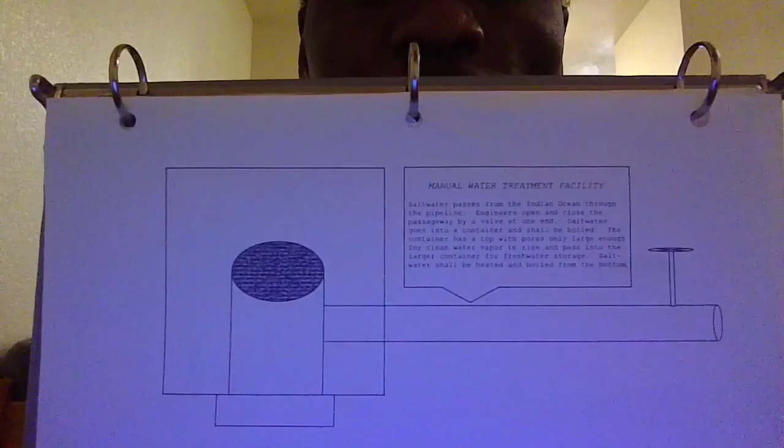Somalia is bordered by the Indian Ocean. The Indian Ocean has salt water. Somalia is mostly desert.

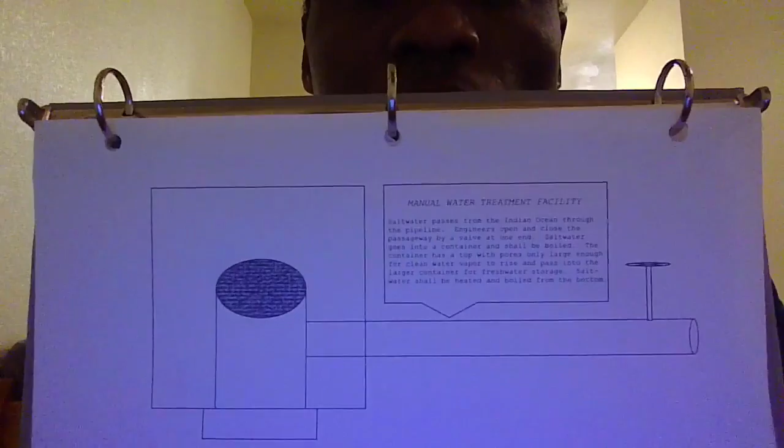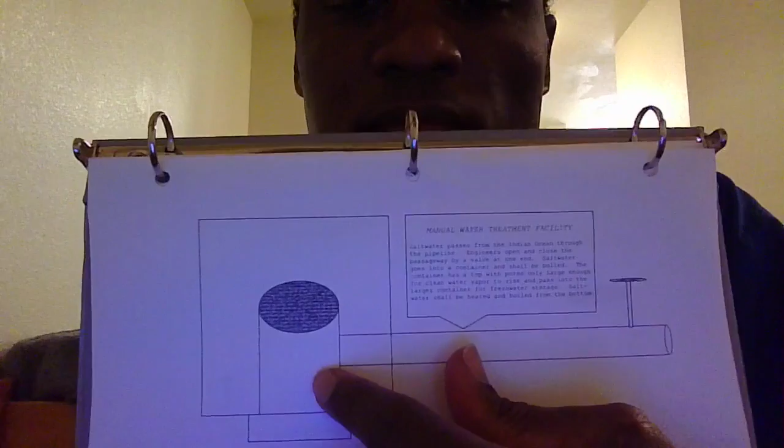This is a plan for salt water to be transported into a system and changed into fresh water for Somalis. Salt water shall come from the Indian Ocean into this pipeline, go through this pipeline into this compartment. This compartment is where the salt water shall be stored and vaporized, and the vapor shall go through these perforated holes and settle into this larger compartment as condensed fresh water.

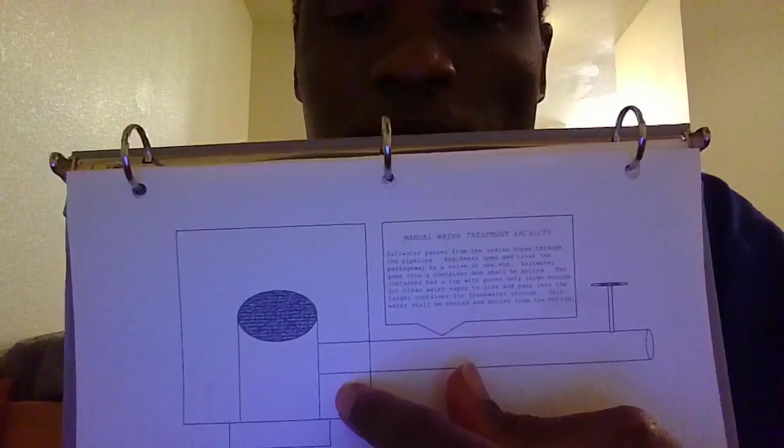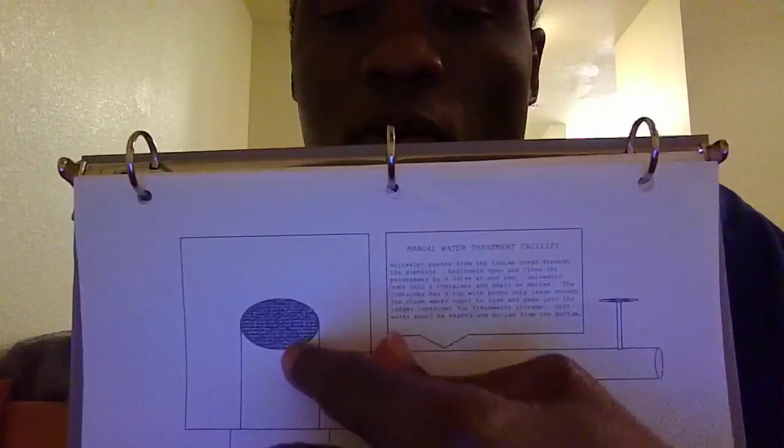Now, there will be engineers that will monitor this compartment so that salt water does not overfill into this compartment, and fresh water does not overfill back into this compartment.

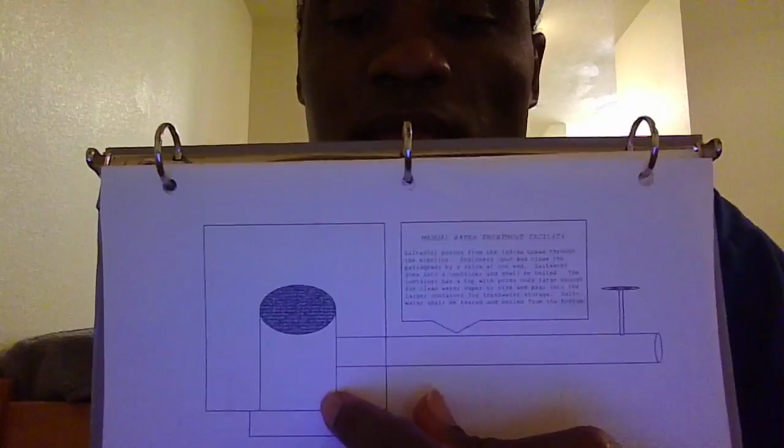In this part of the system, it performs like the eye of a stove. It regulates the temperature of the water in this compartment to make sure that the temperature of the water reaches the boiling point, so that it will vaporize into condensed fresh water in this compartment.

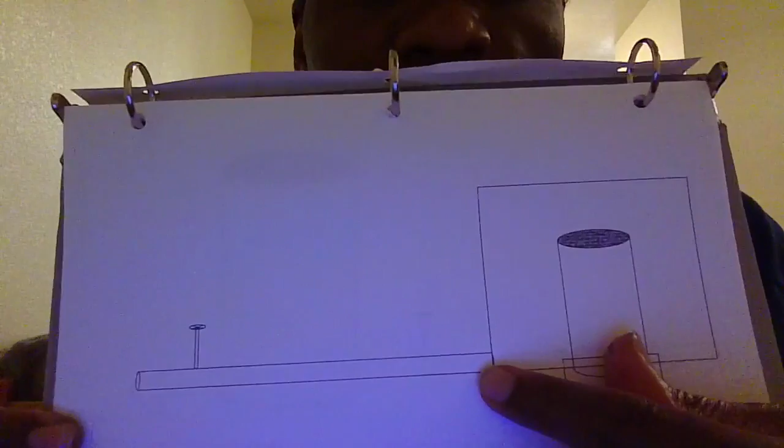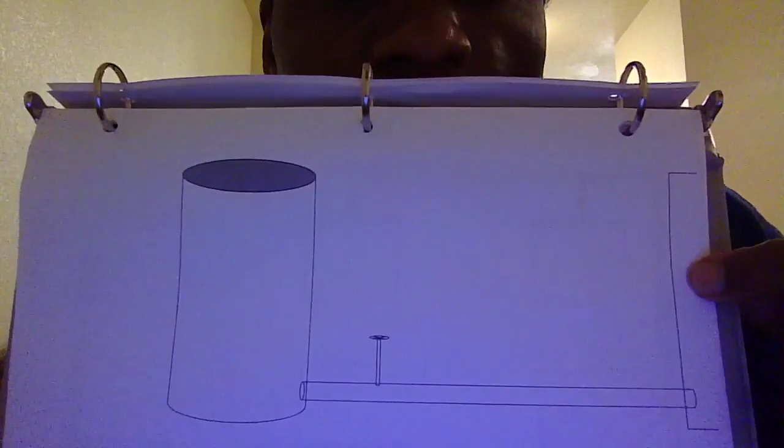This is a diagram of a pipeline coming from the larger condensation tank to another facility in the water treatment system. This is the tank that stores the condensed fresh water. This is a pipeline that continues from the condensed fresh water tank that goes to the fresh water distribution tank.

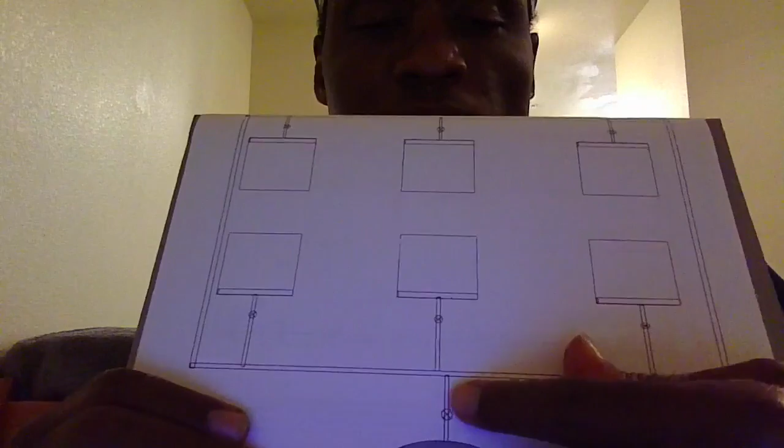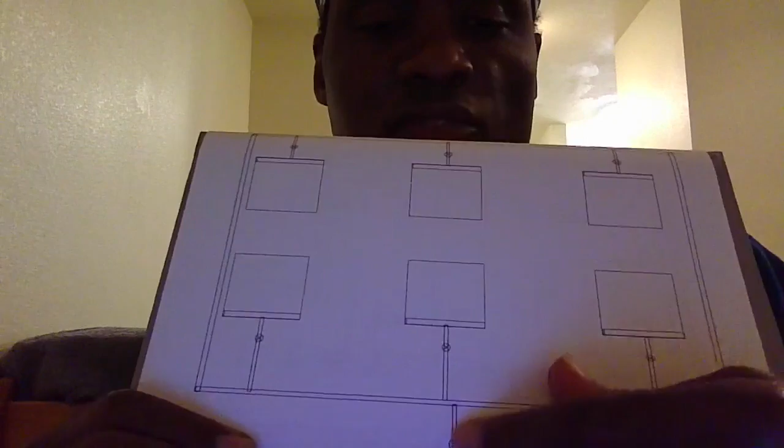This is an aerial diagram of the freshwater distribution tank, the pipeline that transfers fresh water from the freshwater distribution tank to other pipelines that are connected to smaller pipes, that are connected to pipes inside houses, so that each house will receive fresh water from this freshwater distribution tank.

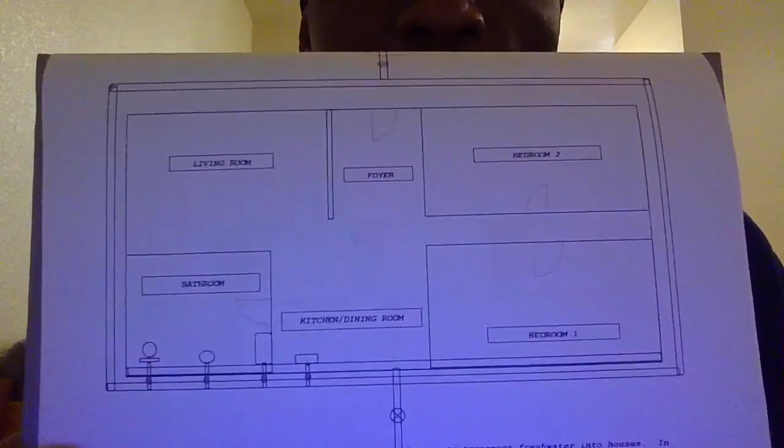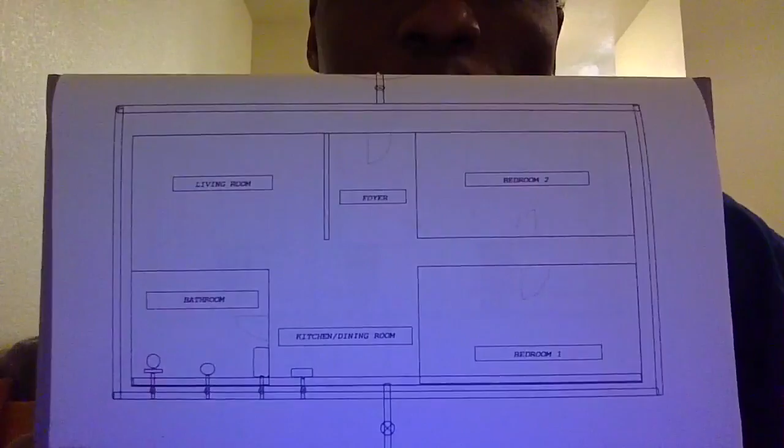This is a diagram for a house in Somalia. Now, the Bible says that no house built on sand shall last, shall be durable. But we're not building houses on sand. A concrete slab is a human-made rock, and the purpose for a concrete slab is to be this human-made rock that the house shall sit on, because the Bible also says that if a person builds a house on the rock, it shall stand and shall not wither away by the storm.

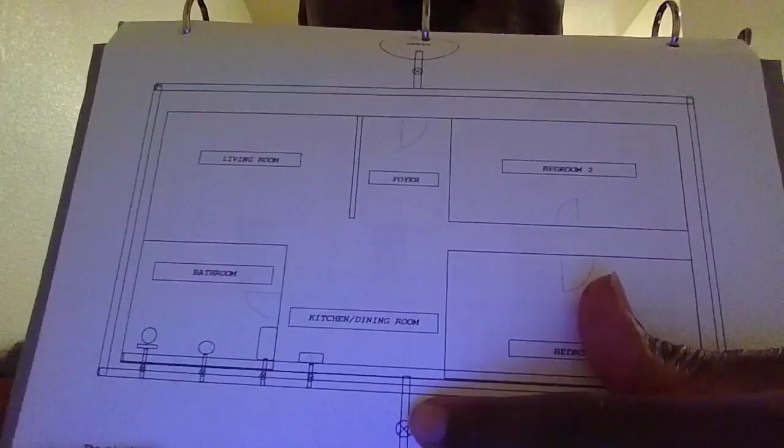This is a house plan for a family or a person in Somalia. Here you have the pipeline that distributes water from the fresh water distribution tank around the house. These rooms right here are rooms of the house. I believe this is the bathroom. You have the toilet, you have the shower, you have the sink.

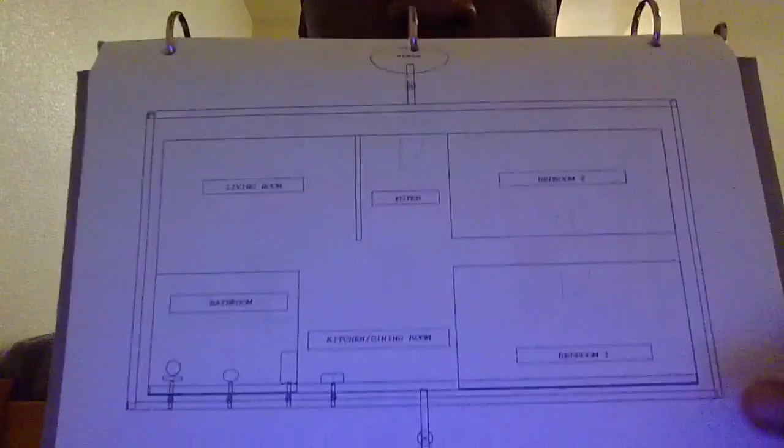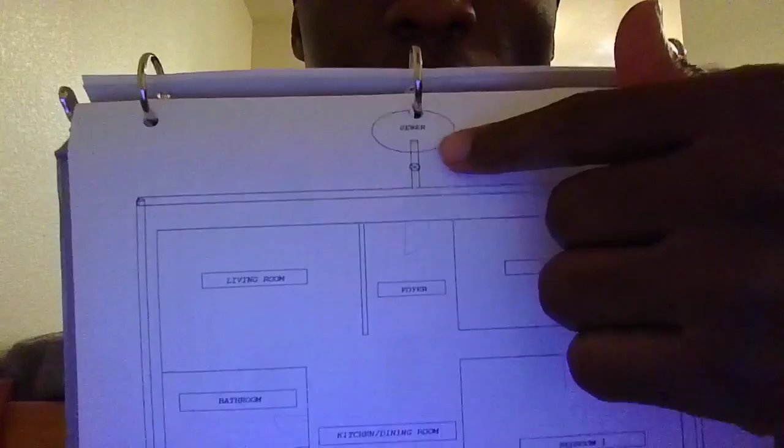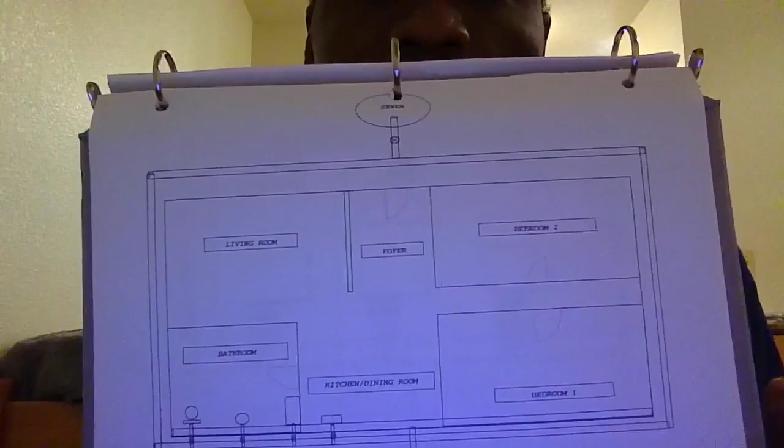I believe this is the sink for the kitchen area, and it also has smaller pipes that transport fresh water into the house. This part right here is the sewer. If a house has a piping system that transports fresh water into the house, you're going to need another piping system that transports sewage from the house to keep the house clean, to keep the fresh water separate from the sewage water.

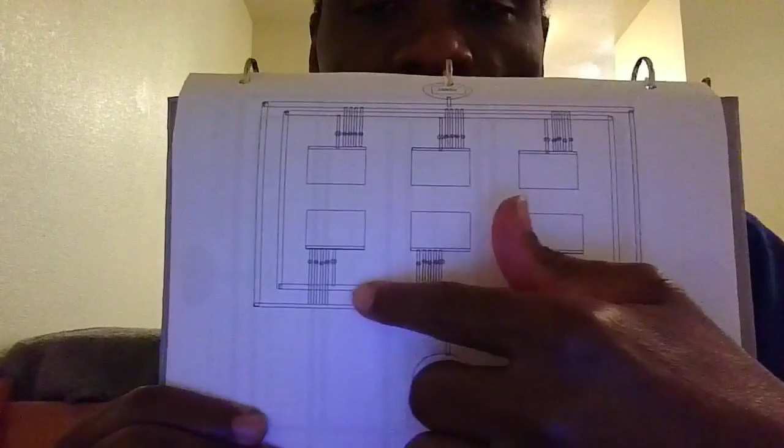This is what I'm talking about: two separate piping systems. You have the well right here, the fresh water well, fresh water distribution system. It distributes fresh water through a pipeline to pipes around the house and around the houses. The houses have pipes that are connected to pipes that are connected to the initial pipeline from the well that send fresh water into the houses.

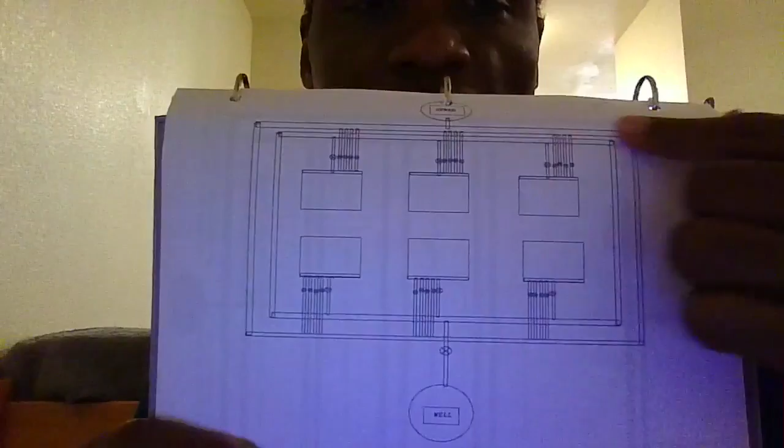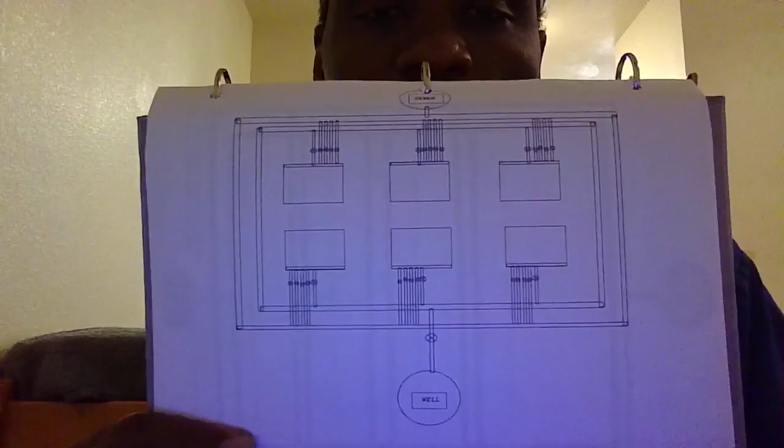You also have this outer pipeline that is connected to the sewer, and this pipeline is separate from the fresh water pipeline, because you never want the fresh water and the sewer water to mix. It'll contaminate the whole house and make the house and building uninhabitable, and that's not what we want to do.

We want to improve the quality of life for people in Somalia.

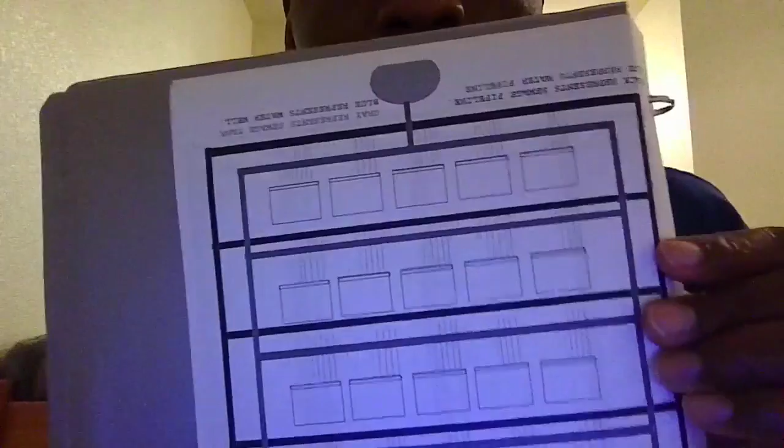Think of all these squares as houses. This is a neighborhood, and the light blue pipes are the fresh water piping system. The dark pipes are the sewer piping systems.

Now, the sewer pipes are designed to be beneath the fresh water pipes. Just in case the sewer pipes burst or compromise, you don't want sewer water being on top of the fresh water pipes and being at risk of contaminating the fresh water for Somali residents.

Notice too that the sewer is separated from the fresh water. The fresh water distribution system and the sewer system are separated because you want to keep the sewer system separate from the fresh water system. One puts fresh water into the houses, and the other takes sewage from the houses.

Now, this is a plan for the commercial district. You have the outer sewer system pipeline, and you have the inner freshwater distribution system pipeline. The sewer system pipes are designed to be beneath the freshwater system pipes.

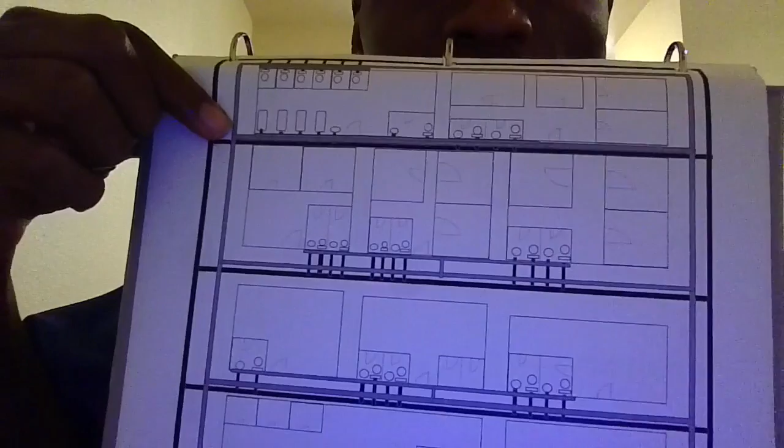Just in case the sewer system pipes are compromised, it won't leak sewer onto the fresh water pipes and risk sewer or contaminated fresh water going into people's houses and buildings, making them sick.

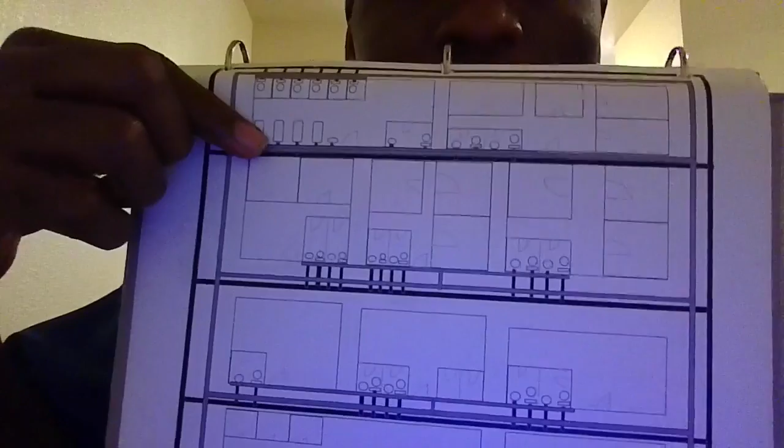Now, this is a plan for a commercial district. A commercial district usually has a store, a post office, a bank, a jail, a police station, and a school.

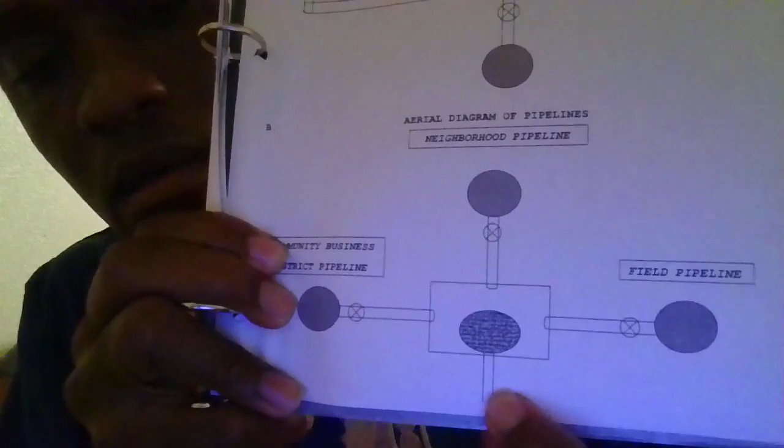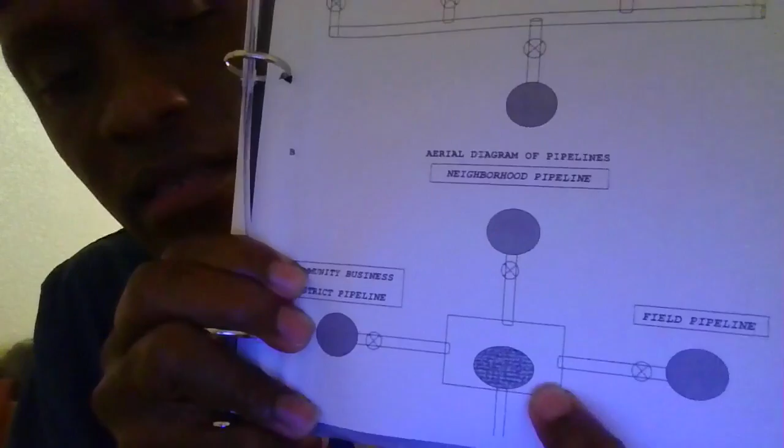This is an aerial diagram of the pipeline that comes from the Indian Ocean that brings salt water through this pipeline into the base of this compartment. As the salt water boils and vaporizes, the vapor goes through this perforated lid and settles into this larger compartment, but it does not overfill back into this compartment.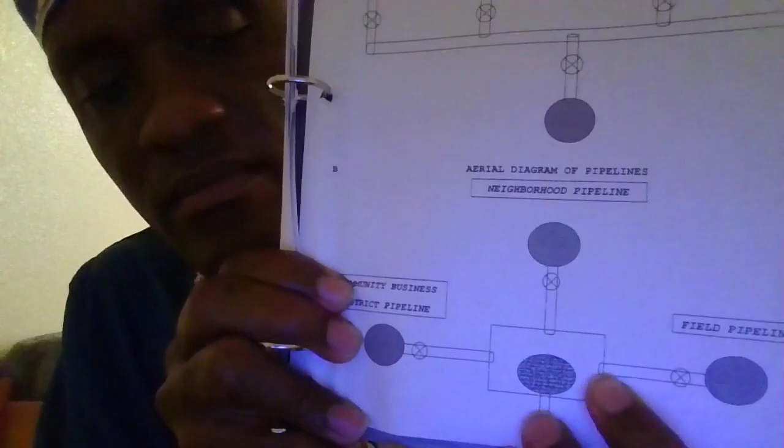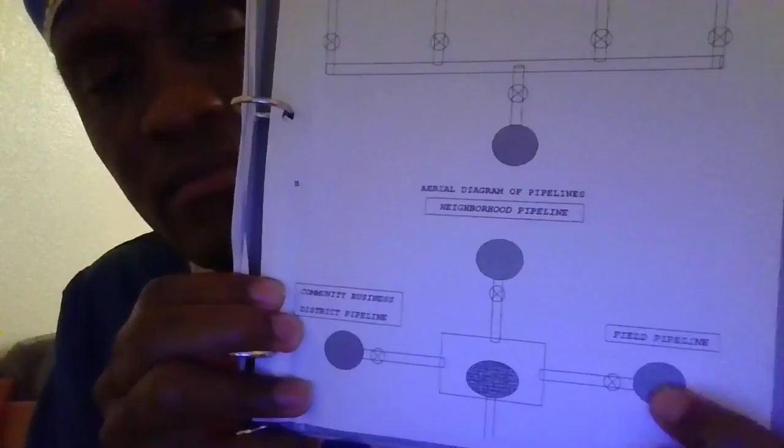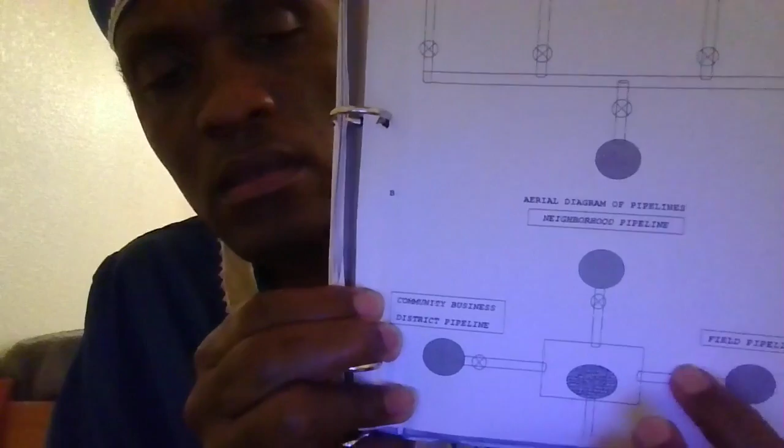It stays in this compartment and is transported through these pipelines. This pipeline goes to the commercial district. This pipeline goes to the fields, the land, and this pipeline goes to the neighborhoods. So you have three wells, three separate wells, that are serviced by one reverse osmosis water treatment system.

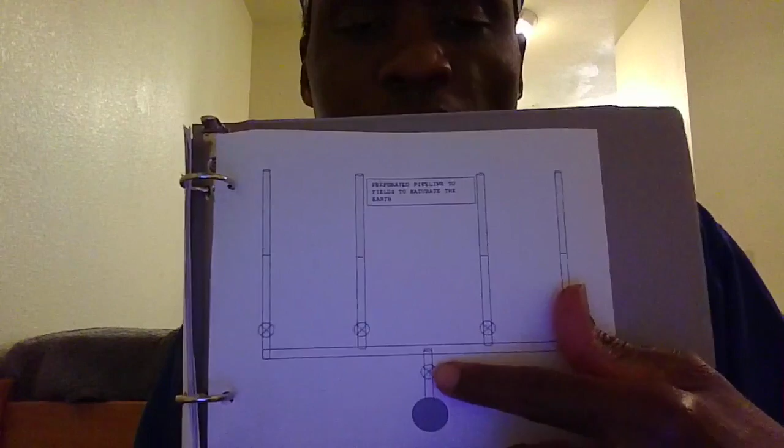This right here is the well that sends water through this pipe to the lands, because most of the land in Somalia is desert. And most of the desert, because it doesn't grow anything, is uninhabitable. But if we can put an abundant source of fresh water into the lands via these pipes...

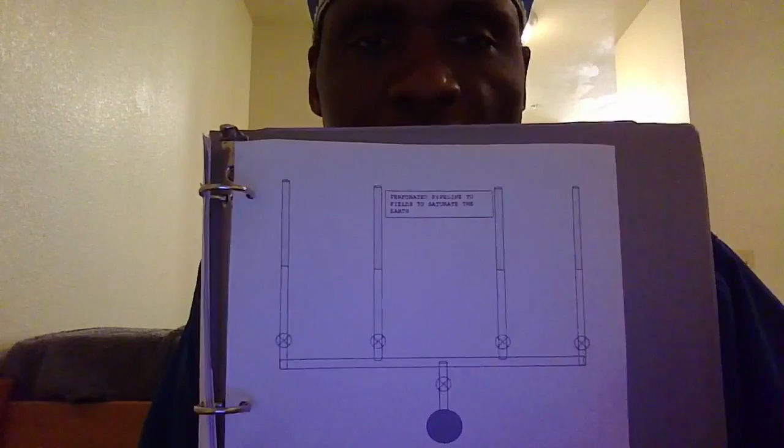This part of the pipeline is perforated. Perforated means there's a difference between perforated pipes and solid pipes. Solid pipes have no holes. Perforated pipes have holes so that the water can purposefully seep through these pipes into the lands, to make the land fertile for farming and for raising livestock, and to get people back into these areas to inhabit it and improve the quality of life in Somalia.